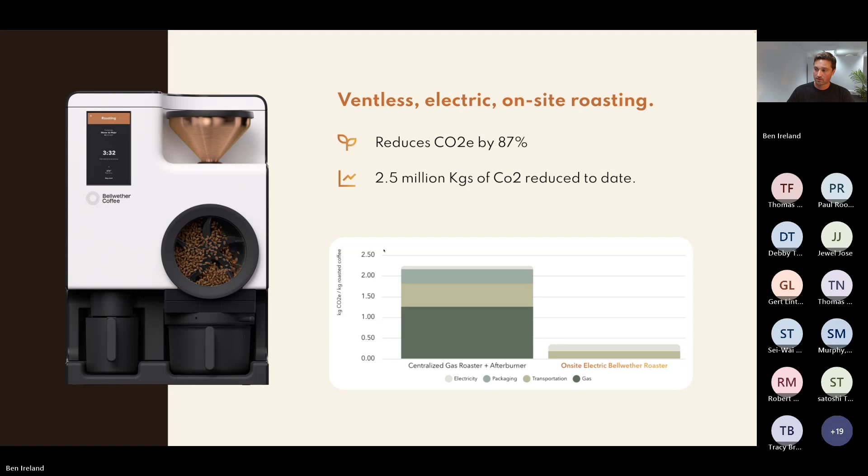So I mentioned high grade as an example, fairly typical customer story, but the use cases for Bellwether are really varied. And so for some quick other examples that might resonate with some of your businesses as well, Muji, the global retailer, they installed a Bellwether in their flagship store in Tokyo, roasting all of their coffee for an on-site cafe and retail sales, and now rolling this out to other stores across Japan.

Bon Appetit, part of the Compass Group, they're using 2 roasters in their commissary kitchens to serve offices throughout the Bay Area in San Francisco, and they're roasting over 200 kilos per week for custom coffees for each of their clients.

Starbucks, in their reserve store in Bali, has a Bellwether installed as part of a kind of seed to cup concept within the store, but roast profiles are created, curated, QC'd and managed in their US headquarters and transferred over to the other side of the world.

And then finally, for an example of Bellwether used at scale in what would have previously been a traditional roastery with gas roasting operation, Heirloom Coffee Roasters in California have 18 Bellwether Series 2 roasters as part of a switch to electric.

So yeah, here in Europe, it feels that we're really just getting started, but we're working with a real broad range of customers who have pre-ordered their Bellwether shop roaster to arrive later this year. This is everyone from specialty coffee, small independent coffee shops, specialty coffee shops, through to cafe chains, to established roasters, and then even on the other end, individuals starting up a whole new business built around Bellwether roasters.

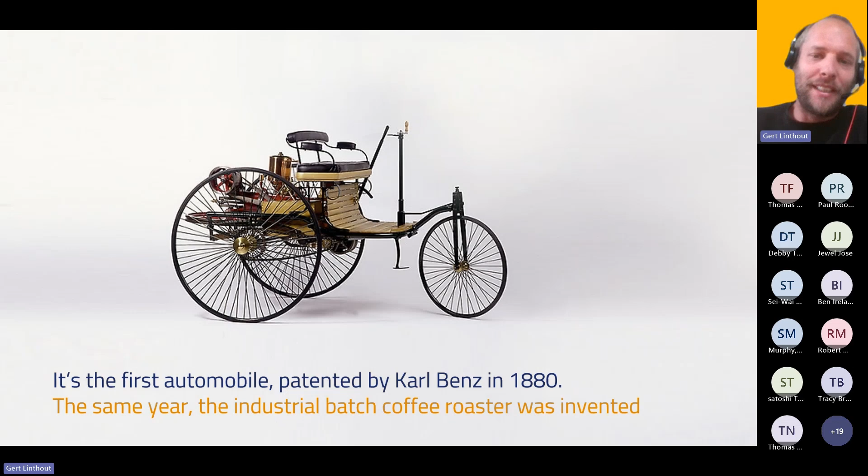Hello, everybody. Does anybody in the room here know what this is here on the screen? Well, in fact, it's something famous. It's the first automobile patented by Mercedes-Benz, Karl Benz, in 1880, so end of the 19th century. And in fact, coincidentally, it's the same year as industrial batch coffee roasting was invented. So it's nice to know how long we're already going along with the current technologies.

My name is Gert Linthout. I work in several companies around sustainability. I founded Micmac Minuscule together with my wife on second-hand birth lists. I'm a partner at Ray and Jules Coffee, and I'm also lead for coffee roasting at CEE Cleantech, which is the sister company of Ray and Jules.

If we look at the challenges and the opportunities for the future, then I don't think that I'm telling a lot of surprises here by saying that climate change is accelerating and specifically for our sector also threatening coffee production. And so that's specific to our sector, that in fact everybody realized that if we want to be producing coffee, then the plantations should be saved. Second thing, which is positive or an opportunity rather, is the fact that more and more studies prove that consumers care about sustainability and want to pay for it.

And then thirdly, which is also an opportunity, I think, is that we still today on industrial scale roast with technology which is 100 to 150 years old, and fossil fuel is still the norm on the one hand side. On the other hand side, if you compare the technology we're using in food industry broader, but certainly in coffee roasting, then there is a lot of room for improvement on entering the smart age, the digital age. If you look at benchmarks on that point, out of the 10 most prominent sectors worldwide, food is number 9. So there is a lot to be learned from other sectors, also from heavy industry like chemical industry, for instance, which is moving much faster than food industry.

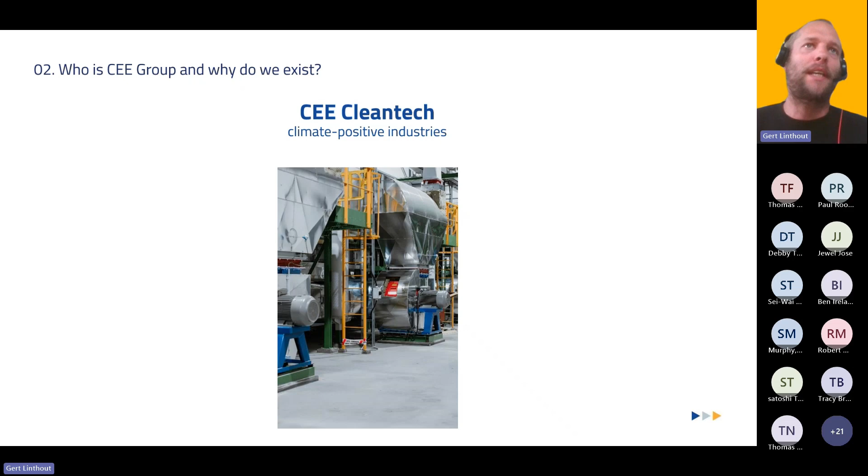We in our clean tech company, this is Koen, our CEO, he was thinking about how can we move forward in conservative sectors like food? And for this, I think it's important to briefly explain who we are. At the start, 2007, Koen founded CEE, the clean tech company, with one goal: to help industrial players which have a large energy demand to move away from fossil fuel. That's what we have been doing since 2007 for more than 200 industrial groups worldwide.

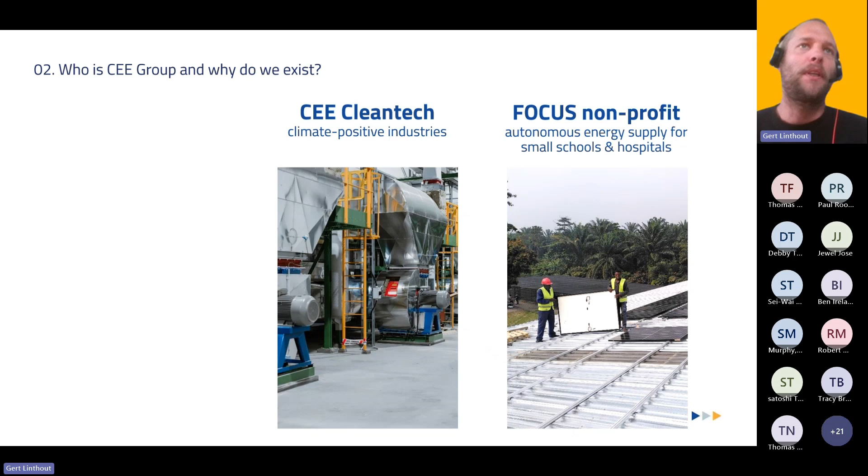A bit later, we also founded our non-profit organization where we help people in the south, small hospitals and schools, to have stable and clean energy supplies. And it's the engineers of CEE who also do this voluntarily next to their jobs. And then in 2017, working a lot for food and having the feeling that we needed acceleration, we founded our own coffee company to prove that another way of roasting is possible without fossil fuels. So we founded, as a clean tech company, a sister company, which is Ray Jules, the sunny kind of coffee, voila, which is also the first pioneer having used the technology we're talking about.

CEE is there to help energy intensive industries in their journey to net zero with specific clean tech expertise, mainly around thermal processes, end to end. So from idea to realization, and even financing is what we do. And we help speed up the transition by financing the clean tech we build, to make sure that, certainly if it's new technology, part of the risk and part of the capex risk can be taken away.

We have done this for more than 200 groups, as I already explained, in fact in 2 to 3 domains: roasting, what we're talking about today; drying, think of drying of malt, for instance; and new technology development, so from scratch. An example, we just built a factory for CO2 absorbing bricks in the construction materials sector, which was a technology that was thought about for decades but never realized on large scale, and that is what happened last year.

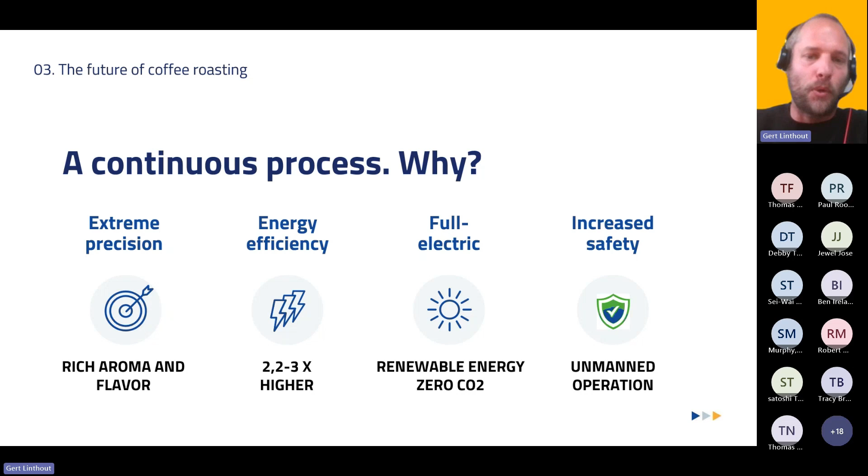And a last one, which we realized only during operation, is that because we built the technology in such a way that it's much more safe, it's also easier to move to unmanned operation. It's something that we did from day one. We leave our roaster unmanned during the night, for instance. Why? Because it has been built in such a way that it's always monitored, that there are much less risks in terms of temperature and so on. So also safety is a benefit, which we didn't envision at the start, but what we saw during operation ourselves the last 6 years. This is the technology.

What you see here is a roaster which roasts horizontally, which means that coffee beans are transported through different zones on a perforated belt. And in those different zones, we can apply specific temperatures, air speeds, air directions. And it's during those different zones that we are able to create the recipe. So in fact, we build technology around the coffee bean. So you could say, except for the fact that the beans are not moved vigorously like in a traditional system, that the bean, from a temperature point of view, doesn't know she's in another roaster, which we did on purpose, because we want to create that flavor profile as you do in traditional roasters, but without the drawbacks of the technology.

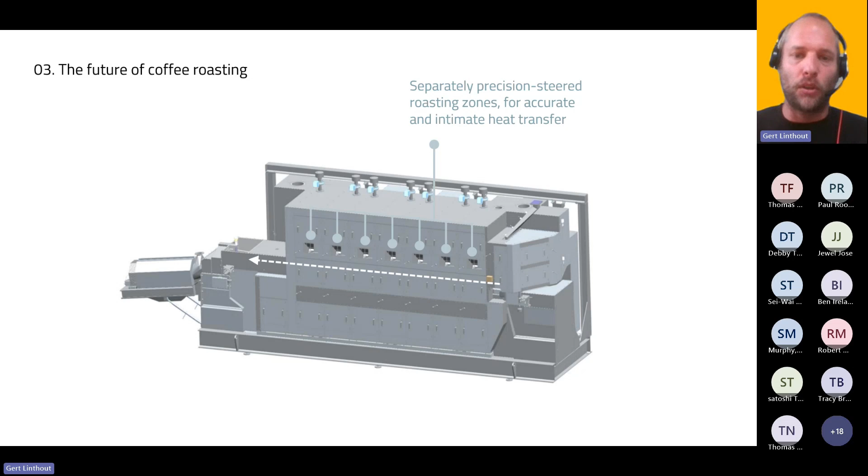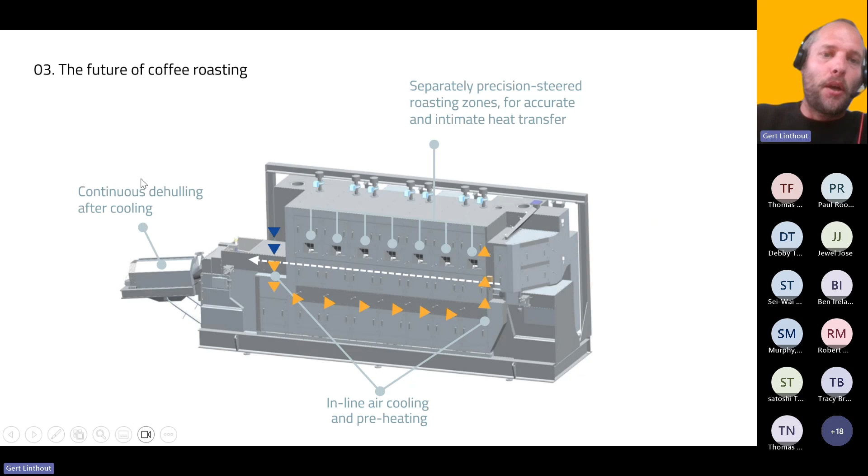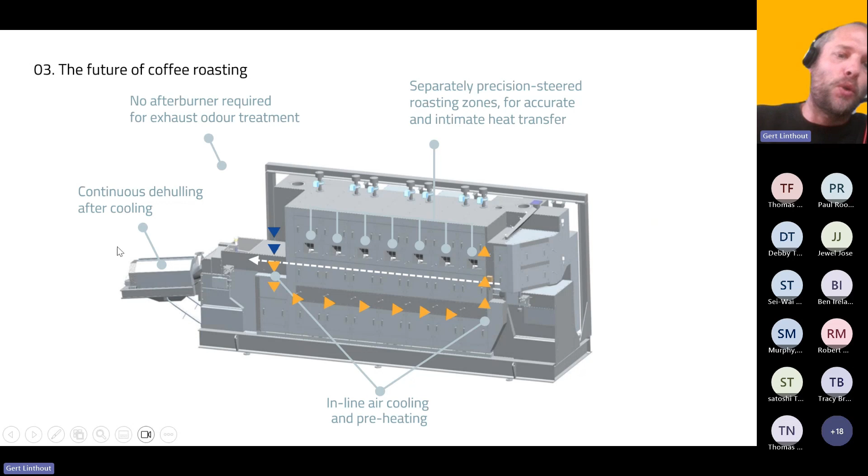Of course, if you have a continuous system, it's much easier to recuperate air at the end and to preheat, which also means that we don't need water to cool down the beans. We just cool down with air. We can foresee quenching, but we don't need it, which also means that we have no need for afterburners, because the temperature of the air is much lower than a traditional system, and it's a continuous flow, and we don't have those peaks of the quenching of the coffee beans. Dehulling we only do afterwards, after the beans have left the roaster in the cold stage, which also adds up to the safety aspect.

From a benefit perspective, what does this mean? That if you have that more intimate relation between air and bean, that means much higher precision, up to degrees inside the bean. We measured inside the bean to know how that relation is. And secondly, we also see positive tests on reduced material loss.

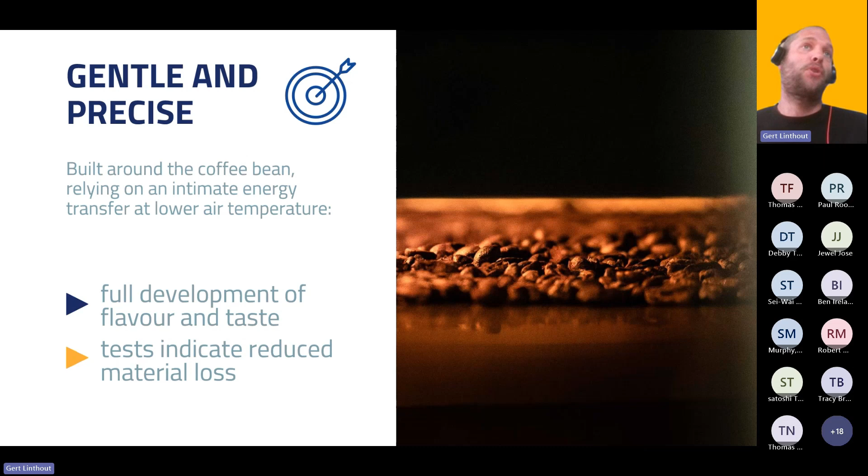Secondly, if you look at efficiency, if you look at a traditional batch roaster with a typical peak in the beginning in energy consumption, you have a stable consumption of energy, which is of course a huge benefit when you want to connect to the grid.

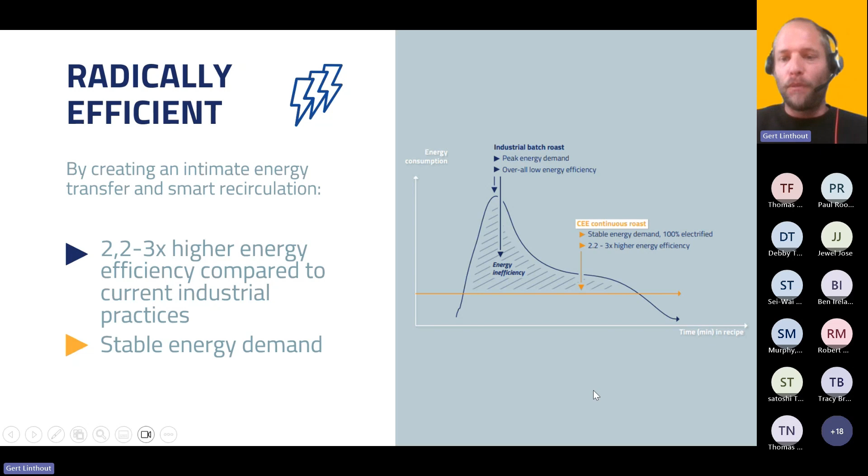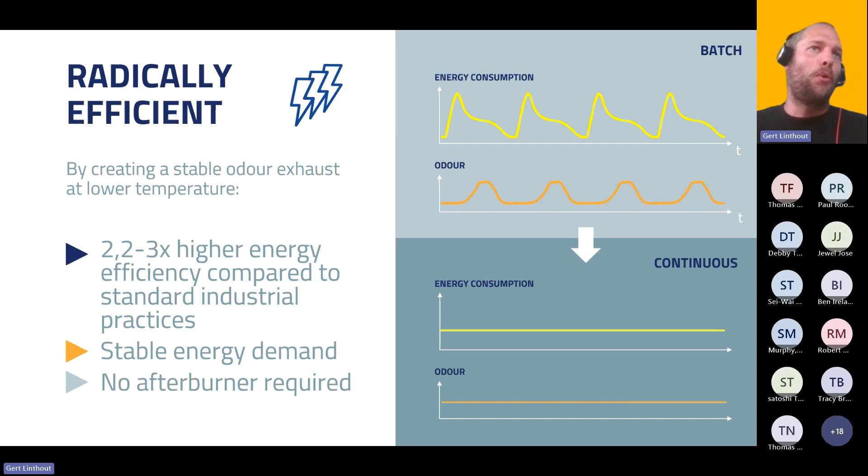In our specific case, this also means that an afterburner is not needed. We just use active coal in our current system. Why? Because the temperature of the air we have to treat and the volume is much lower than in a traditional system. As a result, it's quite logical that the connection to the grid is much easier.

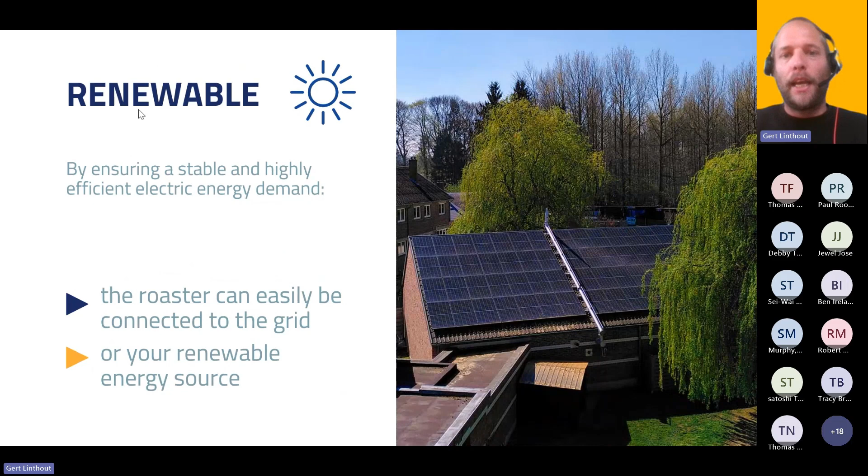And then from a safety perspective, to make it more intuitive, the system is more safe because the maximum air temperature is lower than in a traditional system. It doesn't have to be much higher than, let's say, 10 degrees higher than the hottest temperature inside the bean.

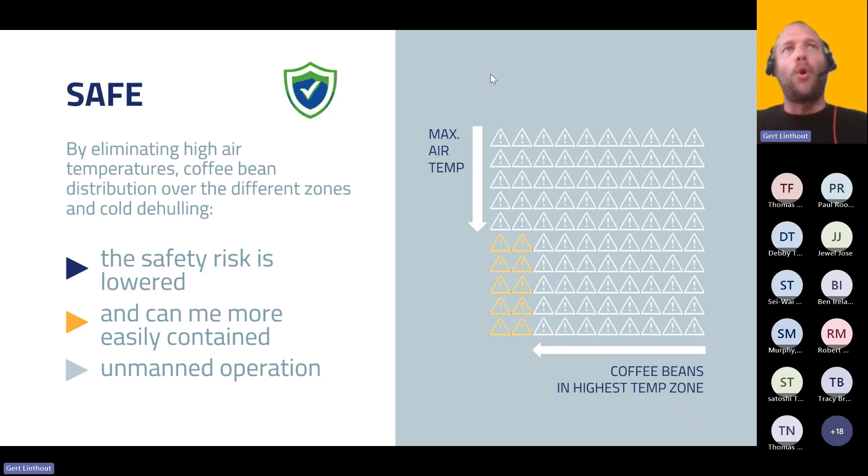And the number of beans in the hottest zone is also much lower, which means that the thermal mass that we have in the danger zone is much lower, which also means that the means to protect the machine and the sensoring can be limited to several zones, not to the whole batch as in a traditional system.

Which capacity range do we cover? We have today the Kaldi for 150 to 500 kilograms an hour, the Zephyr is the medium size, 500 to 1500 kilograms an hour, and the large one, the Sherpa, goes up to 4000 kilograms an hour, which means that we cover the range of small to large scale industrial roasting. We won't go below 150 kilograms. Why? Due to economic reasons, but also due to technical limits of the technology.

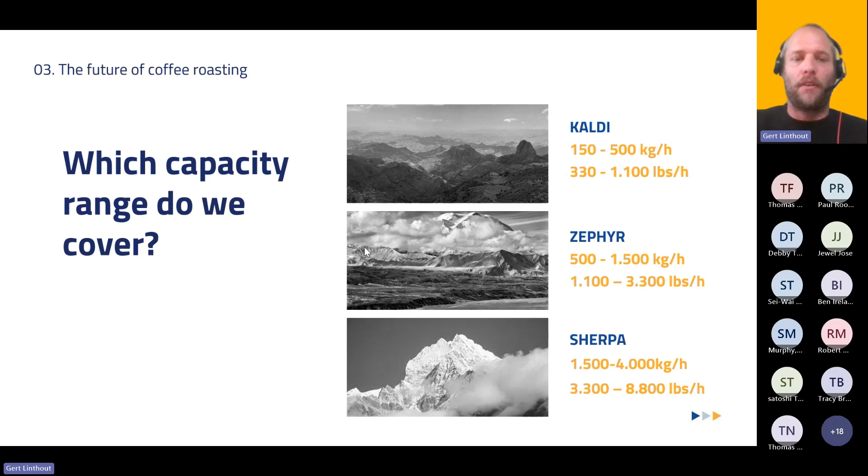If you look at the near future, with continuous technology, which is the norm in most other industries, you can expect quite soon that quality monitoring and steering will be done continuously and in real time. If you link this to advanced sensing and AI, it's not so difficult to imagine that in future optimization of recipes in terms of energy consumption, but also flavor profiles, will be helped by artificial intelligence, certainly because you can sense everything in our system, the bean temperature as well as the atmosphere in each different zone. So chemical composition, temperature, and so on.

Potential health benefits have been suggested. We're looking into this with a university. And then 3 to 5 years from here, what we learn from the drying industry is that high temperature heat pumps are typically applicable only to continuous systems, which also means that one can expect an additional cut in energy consumption in the years to come.

And of course, we're thinking about this now already upfront, because we are doing this already in our drying technologies, to make sure that we build our machines in such a way that they can be compatible once those high temperature heat pumps are available up to, let's say, 200 degrees Celsius. So this mainly means that continuous systems are a very good platform to build further on, from a data smart perspective, but also for further energy consumption optimizations.